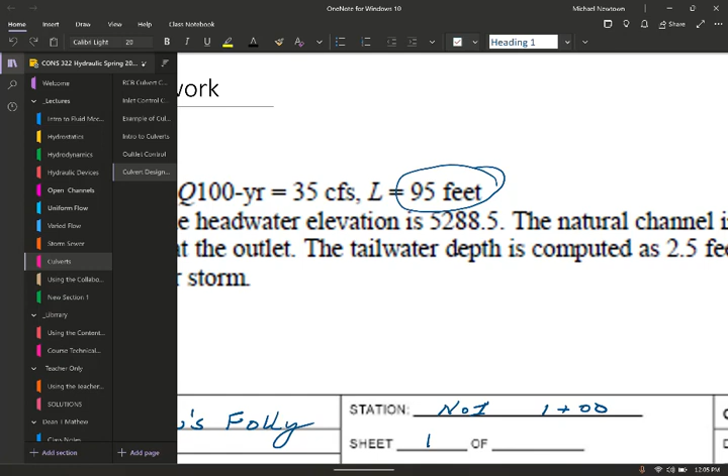It has to be the overwinter break, summertime. I'm like a student, or do I have a job? You're an accountant. Do they know it's big? They can, but you're going back to your parents' house. They don't know anything. They're like, oh my gosh, you're going. Cool, he's going back home. So they see you, and you just got like a big giant face tattoo, like a spider or something like that across your face.

Okay, so storm sewers. Things that are missing. So, who hasn't had hydrology? Rainfall, that sort of stuff?

The rest of you have? So, in the grander scheme of what you'll learn from Regal and hydrology and hydrogeology, it's just a mouthful, it's so much fun to get it out. And actually, she just called it hydro, right? Yeah, why'd you create the title? She did it, not like anybody else did. But anyway, now she's listening to this. I'm criticizing her on the recording, so remind me to edit later.

But either way, when you get to hydro, you will understand how much rainfall is going to hit a given surface area and what the rate will be and all that fun stuff.

There is stuff in the hydraulics book because the hydraulics book was titled Hydraulics and Hydrology, and that's the textbook we've always taught with for hydraulics. But it made no sense to cover two chapters when she's covering a whole book on that topic, so I took it out a few years ago and stopped thinking about it since.

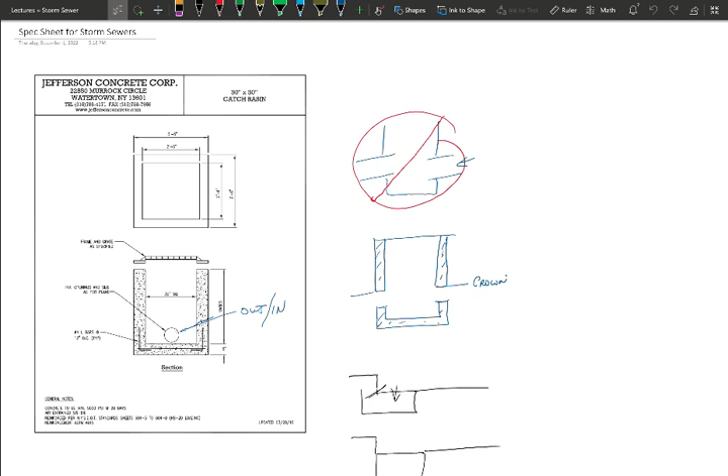Okay, cool. All right, what else is there? So a couple more sketches that I put on here last time.

Curbs. This is actually a curb, and this is my roadway. We're going to have water that washes down along the curb. A high rainwater event will be something like this, and it's all got to go someplace. So I can do a gutter, or I can do a catch basin here with an outlet, and all that water rushes in and everybody's happy. If you see a roadway with standing water after a rainstorm, with cars splashing water up, that's bad design. There should be no water on the road immediately after rainfall—it should all run where it's got to go.

Is this like how you were saying they had to throw in a sewage ejection pump because they didn't have the gravity to get where they needed? Did they ever run into that with this, or would they just try to direct it somewhere else?

They would try to redirect it, or you dig deeper. So when you think about digging this, you're going to lower your pipes down so there's a pitch to it—everything runs downhill. But then we increase the size of the pipe if we have to, to get more flow in there. It'll come out when we do some of the problems here. But do they want to put a pump in these systems? No, actually...

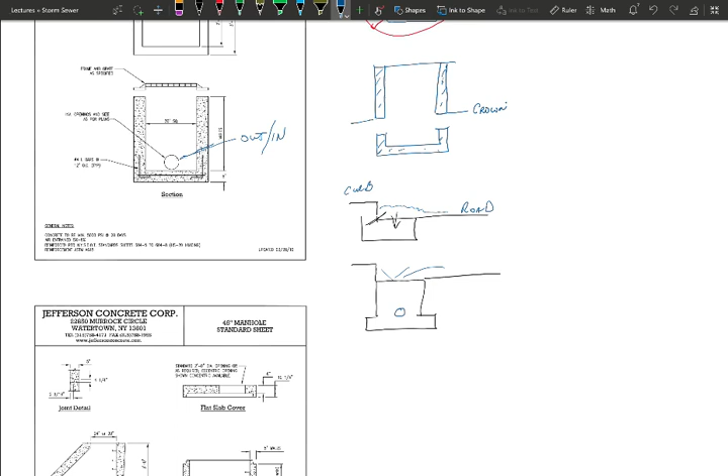Okay, so ideally we want to plan for that stuff to go on. A couple of the other sheets we got here from Jefferson Concrete are manholes. Notice the difference: catch basins can be rectangular boxes or circular cylinders, but this one in particular is a rectangle, and I believe this is the standard box that the city of Watertown uses. But then they have manholes.

So what's a manhole? It's an access point to get a person down in there. Okay, so the first rule of manholes is this: never go in a manhole. You will—somebody will have to. But the first thing that has to happen is it's called a confined space.

There are regulations about how to enter a confined space. You have to test those confined spaces to ensure there are no gases in there that are going to suffocate you. That means you don't stick your head down in there first to see what happens, or you will wind up collapsing in the hole, and then somebody else will have to get your body back out of it, after they figure out what caused you to collapse in there without any oxygen.

So anything that looks like a confined space, do not enter. If that cupboard right there was big enough for you to walk into, you would never walk into it and close the door, because you don't know what gases are in there. The confined space can literally be, well, the—what's the steam thing called? Not the distiller, but the sanitizing one.

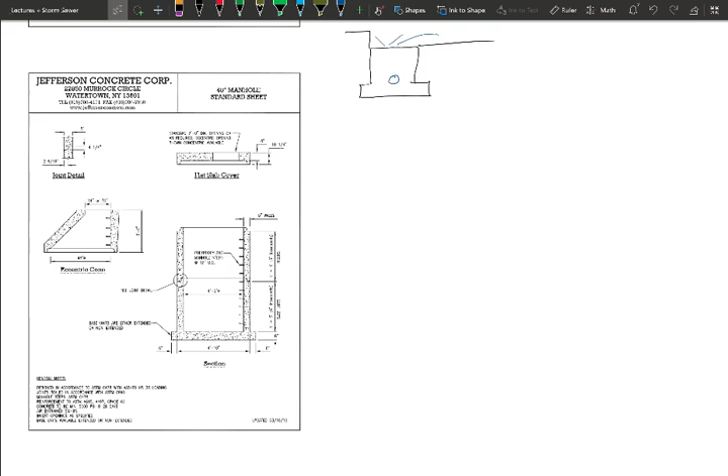Anyways, so OSHA takes governance, but the Department of Labor also has say in it, because they're trying to protect workers' rights. There's a myriad of regulations that all converge at the same point but have different purposes, and thou shalt not violate any one of them, or you're SOL.

Okay, manhole covers - I talked about them being round. There's a piece of steel that goes around the outside that anchors down, with pins here. When they put this piece on top of the manhole cap, there's usually some bricks laid in to give it elevation adjustment. If they repave the road enough times, you'll see them pull those out, get in, and remortar some bricks on top of the old bricks, then set them back in.

So it's not like there's screws anchored down in there - it's just holes they put pins in and call it done. They're wedged between what's called pavers, little one-inch and two-inch bricks made of concrete that they lay in and mortar down.

Another cool fact - they're always made of cast iron, just have always been and always will be. What do you do if that flange breaks? You get a new flange. Oh, that's replaceable? Oh yeah.

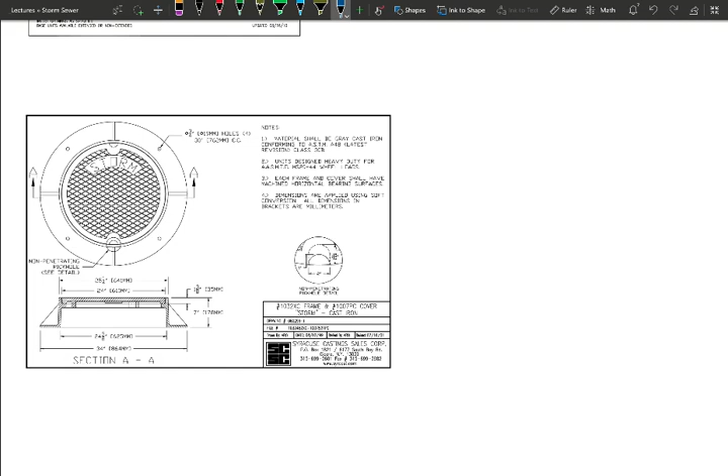This whole thing - literally everything from here up is replaceable, and this is where we're putting that flange, then putting a cap on top of it. You have to adjust the final height between here to match the roadway surface. Ideally, you want to order the right basin of the manhole so the cap ends up at the rough number where you can use a two-inch paver and be done.

Because it's not fun cutting those things into smaller slivers. And you can't have it - well, you can actually see it. There's a couple manholes down on Main Street that everybody swerves to avoid because the tire goes thunk, thunk, thunk, thunk. They paved it but didn't raise the manhole.

Why do they have manholes positioned like that on the road, staggered all the time? That's not strategic - it's because they just have to miss something that was underground. So it's a combination of things.

So part of what we're going to do between now and next Friday is we're going to lay out some storm sewer designs. Ideally, in a perfect world, you could put them all in a row. But yeah, there are other things that get in the way.

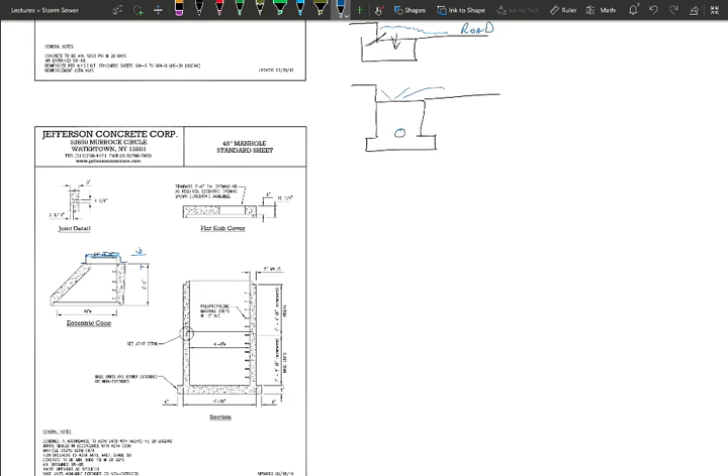Okay, cool, on culverts and not culverts, but storm sewers and catch basins and the parts and pieces that go with us. Okay, cool. All right, let's go see if my page updated.

Why didn't you update? What the hell's going on here? Okay, cool. Well, what I wanted was the page I gave you guys. I don't know where it went. Let me go get it.

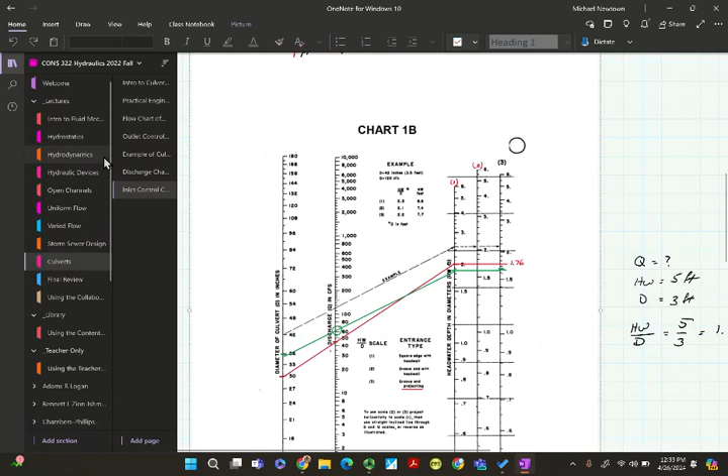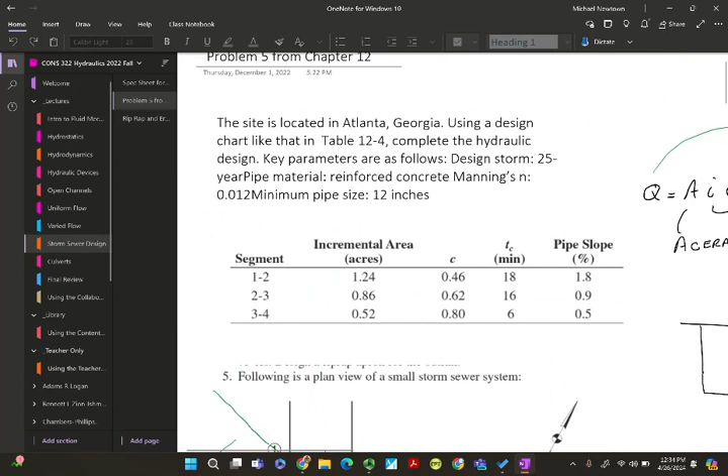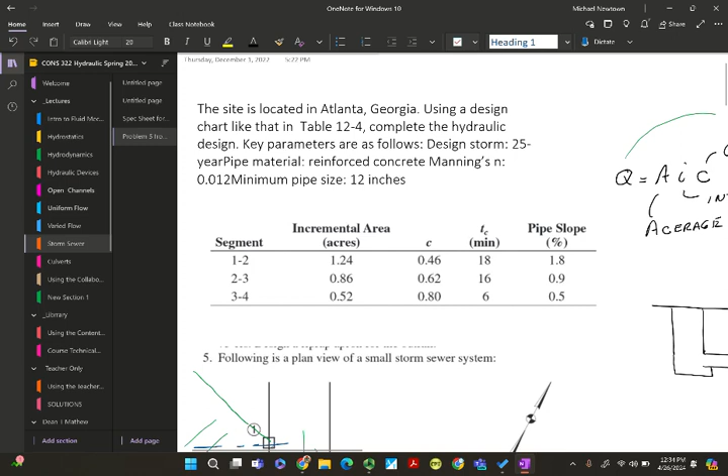Okay, copy. Actually, tell you what, we're just going to cheat. I'm going to move the whole thing over and be faster. To here, lectures. Copy. Okay. Speed versus me drawing a lot of crap.

Okay, so let's talk about this. City of Atlanta has a site using a design chart like Table 12-4, which we'll show you down here in a bit. Complete the hydraulic design. Key parameters are as follows: design storm is 25-year, pipe material is reinforced concrete, Manning's n is 0.012, minimum pipe size is 12 inches.

You're going to get to do a lot of guesswork here and have some fun coming up with things. And we're going to take a look at what can flow, what can't flow.

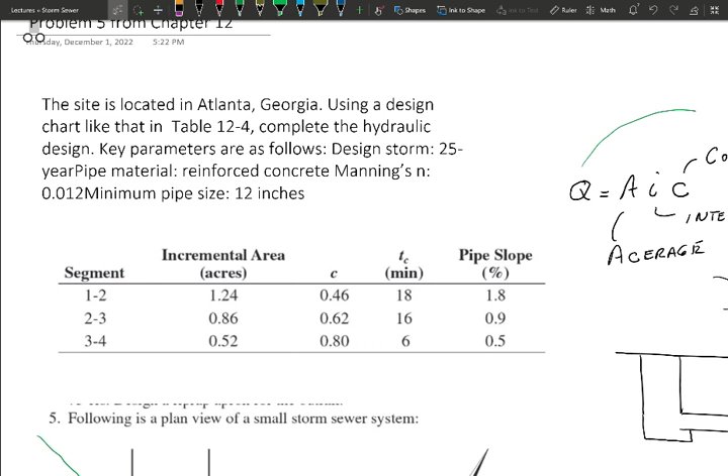The other bit is just for those who haven't had the fun of doing hydrology: Q is equal to the flow rate times the acreage that the rainfall is hitting. The rainfall intensity we usually measure in inches per hour. If you get 6 inches per hour, you're getting a flood. If you're getting half an inch an hour, you've got enough water to deal with. Most things are, you'll get 3 inches of rain in a 24-hour period—that's different than having 6 inches per hour.

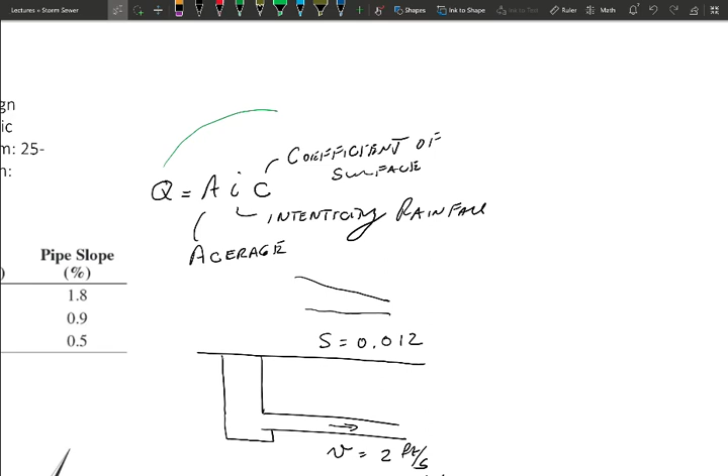And then C is the coefficient of the surface. Everything's got a roughness factor to deal with. So that coefficient of the surface—is it a grassy knoll? Is it a tree-laden piece of land that you've got to deal with? Okay, tree infested, yeah. There's a whole bunch of environmental people out there just screaming at me right now.

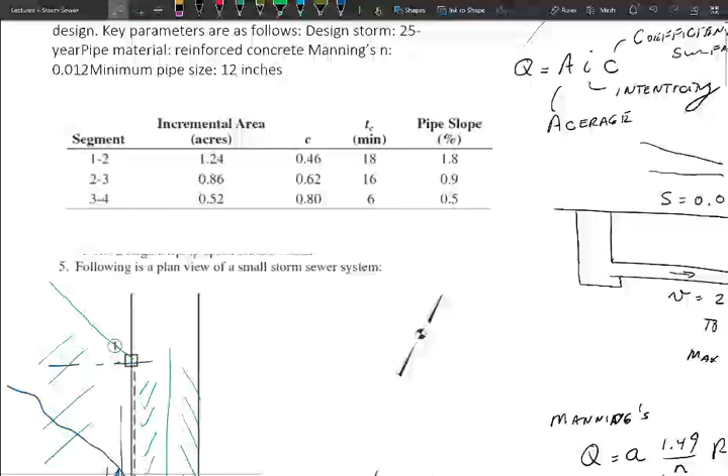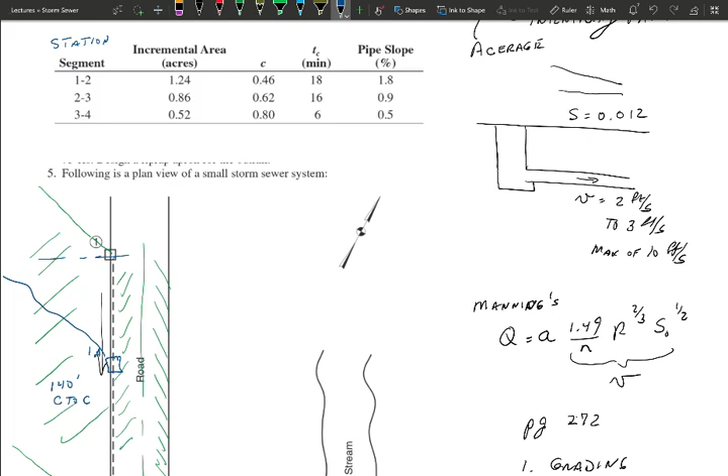Okay, so they're going to give you segments to deal with. Let's see if I can get some of this in here without losing too much of it. You take your roadway, in this case we're going to put the storm sewer in here, and you divide your land into segments. So segment 1 to 2, or think of this as stations: 1 to 2, we've got 1.24 acres of land that we're going to deal with. Our runoff coefficient is 0.46. It takes 18 minutes for the water from the top end to wash down to my road, and we have a slope of 1.8%. Therefore, we can go get our Q.

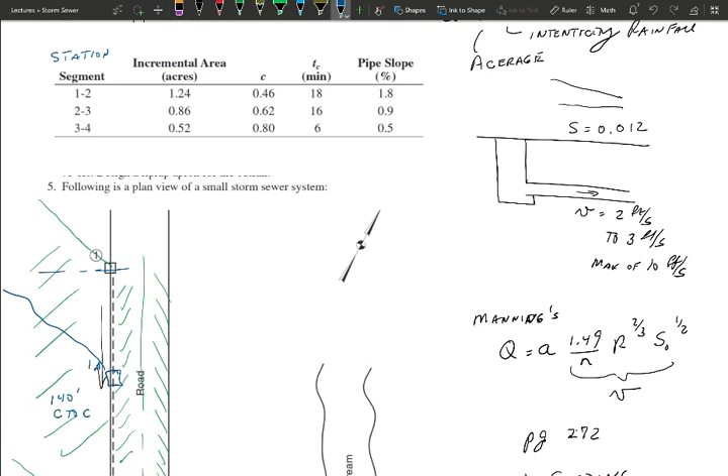And then segment 2 to 3, we've got the following conditions there, a little less inclined, and then 3 to 4. So ideally, you are coming up with your stations here: 1 to 2 was here, 2 to 3 was here, 3 to 4 is there, and we're accounting for all that water. So the water here is rushing this way. That's not a good place to put that, was it?

Rushing like that down to here. And then we're dealing with water that's coming down possibly from another road this way, okay? And then we're going to feed it all out to a stream out here from station 4. But we also get water coming this way across that whole section.

If there is a surface that could possibly have rain runoff, you're going to map it out. For you guys, just to give you some heads up of where you're going with this, there are ways to do this with contour maps. You find a place where it's 90 degrees and draw a line, go to the next contour, draw a line, and eventually you're going to find out where the channel would be for all that water running down. That'd be the ideal spot at the bottom where we put the catch basin.

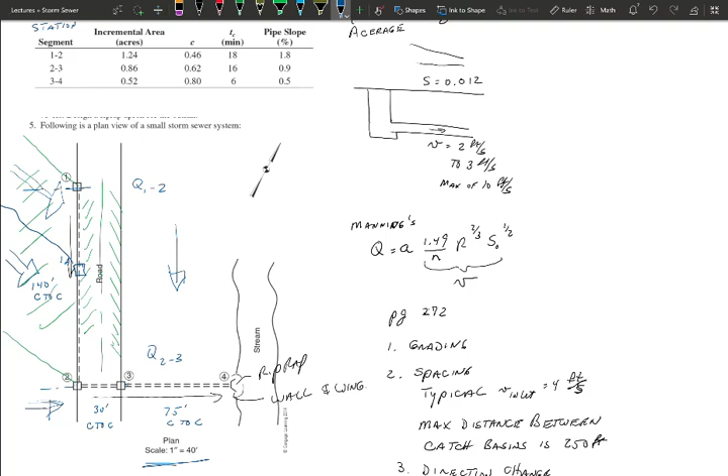Okay, so in doing this, we need to calculate all our Qs. It's going to go down each one of these pieces. So we have a Q of 1 to 2. We're going to have a Q 2 to 3. And then we're going to have a Q 3 to 4. And we have to account for that.

But what happens at station 2? It takes a little turn, yeah, it does that. But what happens at station 2? Is it just the Q from station 2 to 3 that I've got to worry about? No, because it's cumulative. No, you're getting close, Leo, but not quite. It's cumulative.

So from station 1 to 2, let's say I get a flow rate of 20 cubic feet per second. And at 2 to 3, I get another 35. What's my total flow in that pipe from 2 to 3? Q1 to 2 plus Q 2 to 3. Yeah, that's what I was getting at. Yeah, I didn't finish that.

Make sense? Because if you don't add it up, guess what's going to be wrong? Water's going to be backing up in the wrong places. So if you increase your flow size or your flow rate, what you do with your pipes, you're going to make them bigger.

Okay, now maybe not always, because remember, in certain pipes we can have a certain amount of flows that we can deal with, and whether the pipe is under neutral, under the center line, or if it's above the center line. As long as we don't cross the 94% full line, we're good. Water will still go down through there, just how fast and how far it will go. So all those things you've done in the past so far for me is part of that.

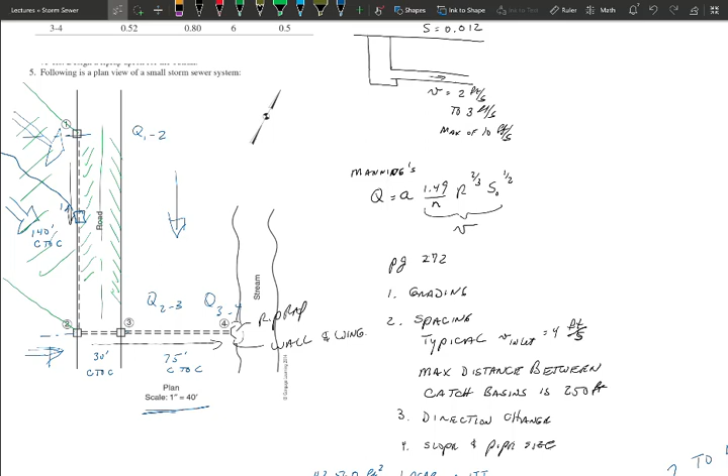Okay, all right, so steps to this thing. Best way to define this is, one, determine the grading - by that I mean slope. Look at slope. Look at rainfall intensity. Okay, get all that down.

And then spacing, we're looking for an inlet that has a velocity of 4 feet per second. So we really want to keep ourselves under that, because 4 feet per second is still quite a bit of velocity. Think about that - I've got to go 4 feet, so I've got to go from here to there in a second, and I've got to get all that water moving down there.

So we give you a ballpark to start with. What's your first pipe size? Max distance between catch basins should be no more than 250 feet.

Three, you've got to take a look at changing directions, because that's like putting a 90-degree elbow in a domestic water line and trying to get the water from the tower down to the building and have the most pressure you can keep. And when I put a catch basin in and turn things 90 degrees, it's going to turn. By the way, these are not piping systems that come with fittings. The fitting is the catch basin, or a manhole, depending on what you're trying to do.

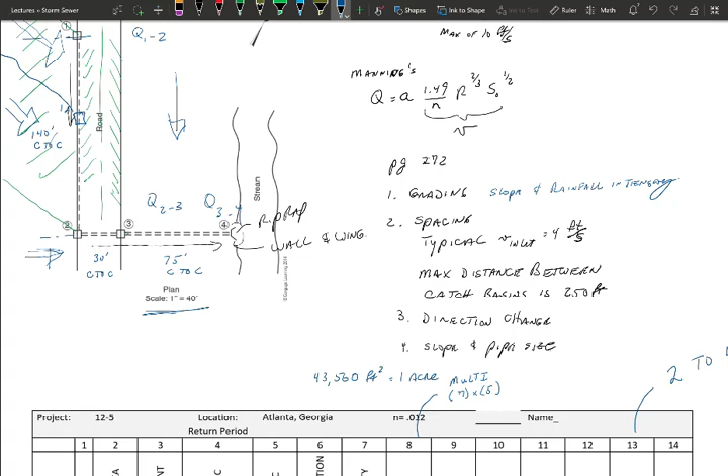All right, and then we've got to look at the slope and the pipe size. Cool, all right, you'll wind up getting a chart that looks like this. All right, so inches per hour, so 5.6. I think that was given to you up here.

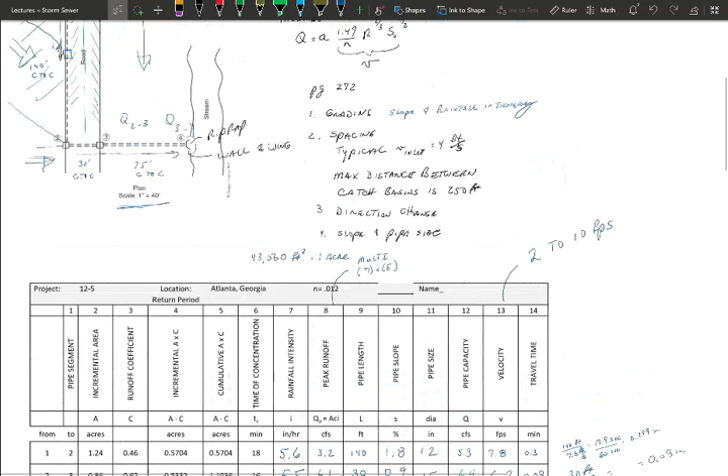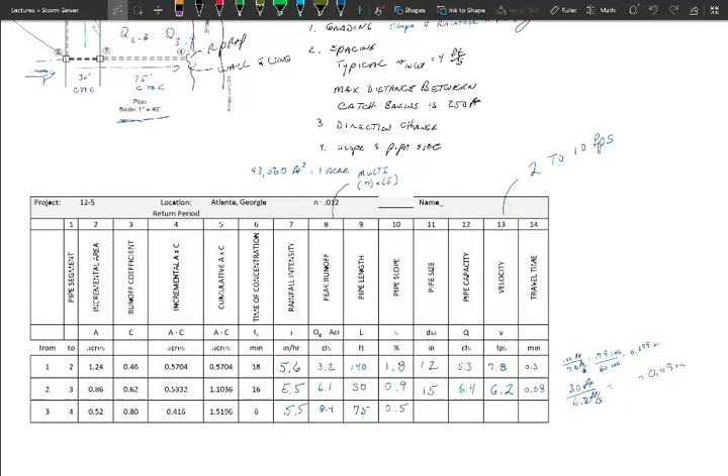Where'd 5.6 come from? Well, when we come back to doing these on Monday and actually do this, I'll explain where that 5.6 comes from. It's not in the chart, and it's not in the table.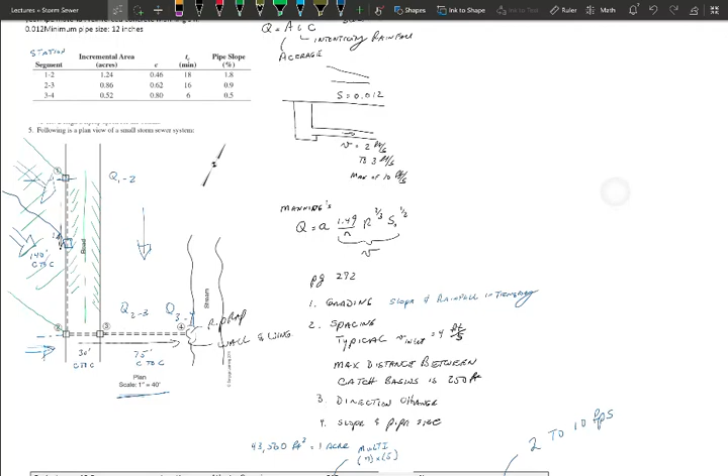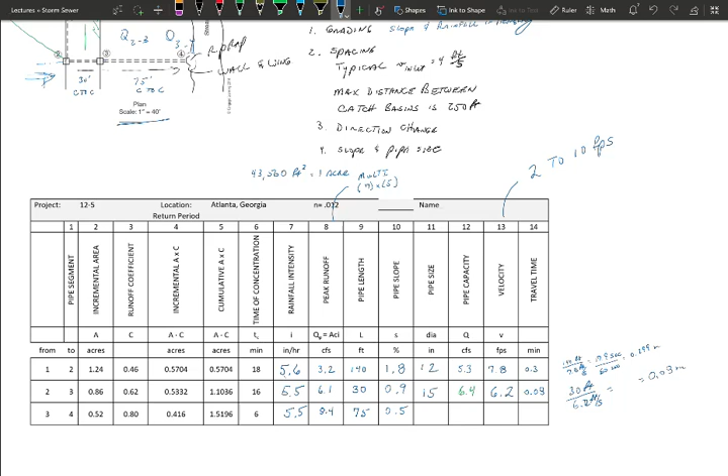We got 1.24 acres. We got 18 minutes of time to go from the top to the bottom. For right now, we're going to fill a chart like this out. Peak runoff - we're going to calculate our cubic feet per second based on the ACI equation. Then length of pipe, we're making choices. So from the first one to two, we put 140 feet in.

And by the way, that goes center to center - center of the catch basin to center of the catch basin. So not 140 feet of pipe directly, but center of the catch basin, center of the catch basin. Okay?

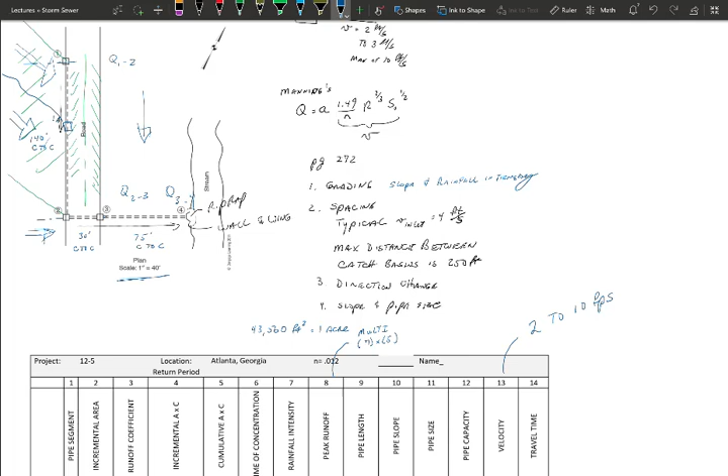And we're going to go pipe slope, and we try to match the slope of the land. Nice thing is Mother Nature designed a lot of land to run downhill - why not use it to your advantage? Why create piping systems that dig deeper than that? Then we choose some pipe sizes, and we choose pipe capacity again based on that. So we got our Q of the runoff, and we're looking for our Q that we can discharge down that pipe. Then we're going to check our velocities to see how we're doing.

And then we're going to take the length of time that travels to get from station to station. Cool so far? Cool.

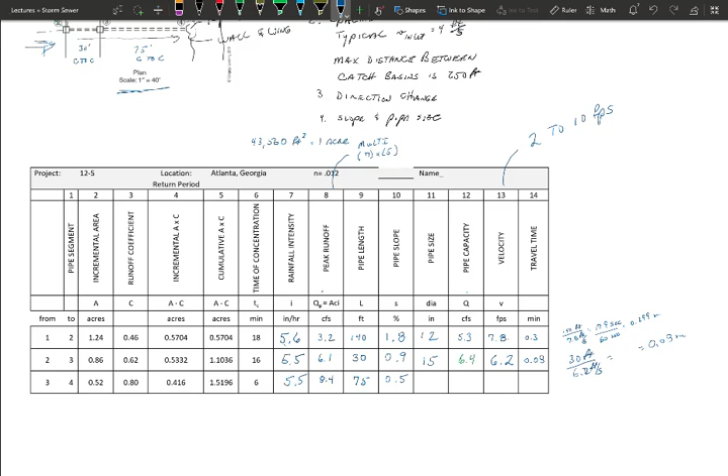One last thing - I know you're trying to write this down, don't worry about it, I'll bring it back up and give it to you. You remember someplace along the line here, I showed you this goofy little thing? Maybe did I? Okay, I'll get you a copy of this. But this is...

What you can discharge through different size pipes, based on the hydraulic element, and we can determine the depth of flow through this. It's in percentage. So if you get 80% of flow through here, we come up and we have it 66% deep inside that pipe.

Then we can come over and actually see what our velocity is going to be and what our hydraulic radius would be out here. And when the two, velocity and hydraulic radius, mesh right there, what's happening? The hydraulic radius, that portion of the water that's in there, matches the velocity on that curve. We can't do any better.

Okay, now you get to the next pipe. I'll show you how to play with this down the road too. But today is a good introduction to all this stuff that goes on with this.

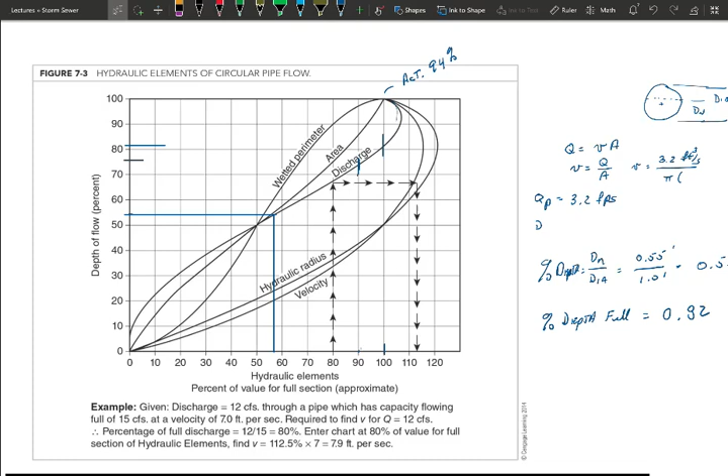And remember these guys? They're back. Actually funny, Jake asked me for some help and I went, oh yeah, where's the textbook? I grabbed the textbook and flipped over to a 60-inch pipe and went, oh yeah, you look here and this is the normal depth. It's like, oh shit, that wasn't what we were trying to do - this was the equation you had to use. Trust me, if you can use this, you don't use the equation. So we're going to come back to all that stuff and I'll explain some more about this.

Almost want to say sanitary sewers - sanitary sewers, all bets are off. A whole new set of rules to deal with all the sludge that goes down with that.

Cool. Everybody good so far? Okay, that was a crash course on what you're going to do for the next week. Save that sheet - we'll fill in some more details on Monday.